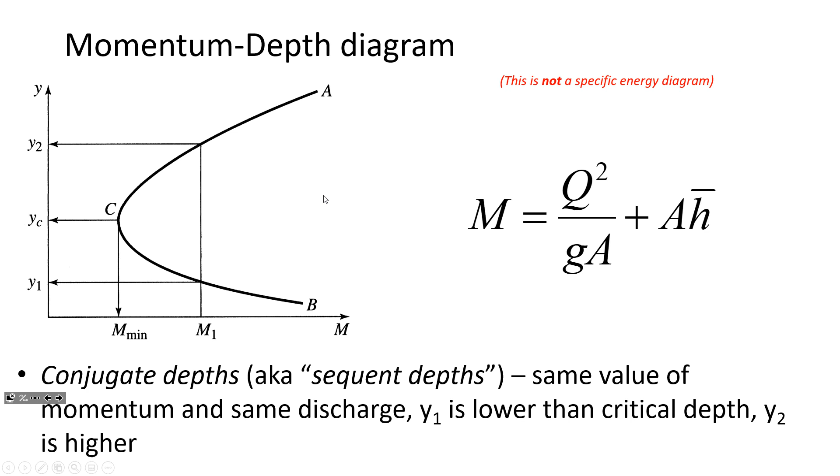And so there's two different depths that have the same amount of momentum. Now, what I introduced in Friday's class was the Belanger momentum equation. That's this one. It irritates me that you can't see that y1 - it's y1 in the numerator of that.

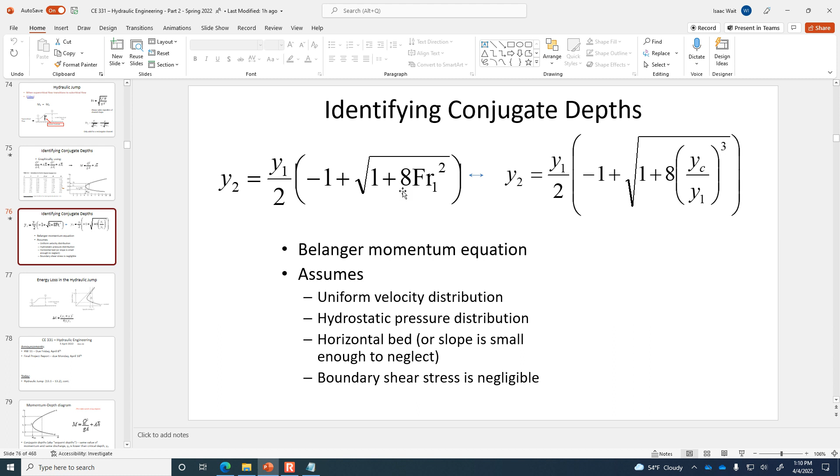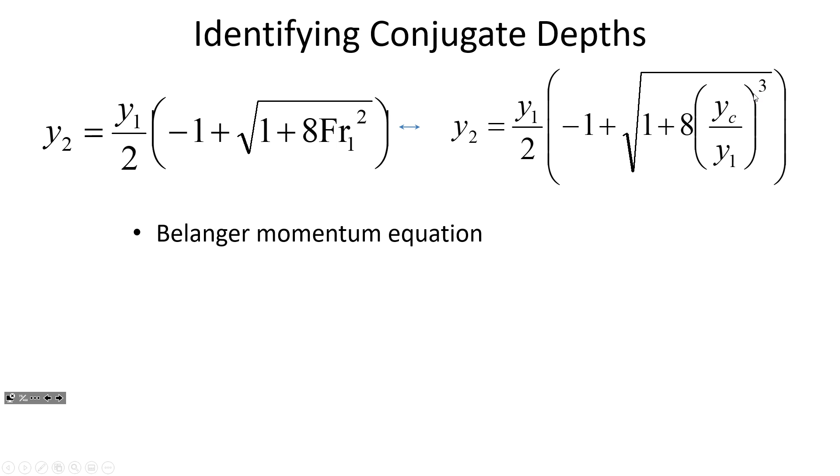Did we see a couple of different versions of the Belanger momentum equation? We did - one in terms of the Froude number, another in terms of the ratio of the critical depth to the upstream depth. And I think in that video I pointed out that if you're using the Froude number version, you're squaring the upstream Froude number, whereas if you're using the ratio of the critical depth and the upstream depth, it's cubed. But with this Belanger momentum equation, we can predict what will be the hydraulic jump's sequent depth.

And so the water is moving supercritical. Why does the water go through a hydraulic jump? It's because this slope can't support supercritical flow. There's something that caused the water to go supercritical, and then it can't stay going supercritical anymore because maybe this is a mild slope. You have to have a steep slope to support supercritical flow.

So you've got this fast-moving water that has no right to be flowing at supercritical conditions. It just maybe water was coming from an underflow gate. That's how we induce supercritical flow in our lab - we've got this gate which is pinching down, and then the water comes out supercritical, and then it goes through this jump and back to the normal depth.

So the channel that's downstream of the hydraulic jump, there's a certain depth that the water will be going when conditions are steady and uniform. Well, once the water came out from this gate, the flow here isn't steady and uniform because we've got an obstruction in the way that changed the flow conditions.

So the water is coming out at this supercritical flow, and it can't stay supercritical because the slope itself only supports a subcritical normal depth. So there has to be this transition. And water can't go through a smooth transition from supercritical to subcritical. It has to go through a rapid transition. And that's what the hydraulic jump is.

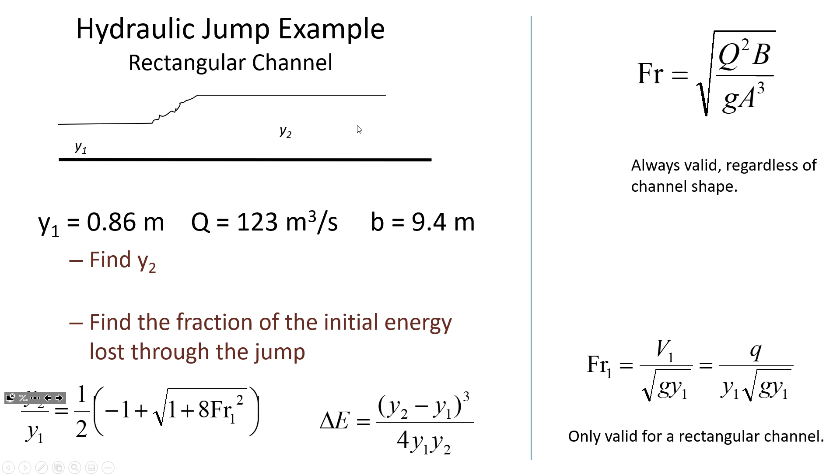Okay, so on this one I calculated the initial upstream velocity, 15.2 meters per second. I also calculated the flow per unit width, although you don't necessarily need that to calculate the Froude number, because you can see it calculated in terms of flow per unit width, or if we just calculate it based on the full uppercase Q, you get the same thing.

Our Froude number is 5.238. So the Froude number is greater than 1, meaning supercritical flow. And this particular channel has a subcritical slope, so it can't support supercritical flow.

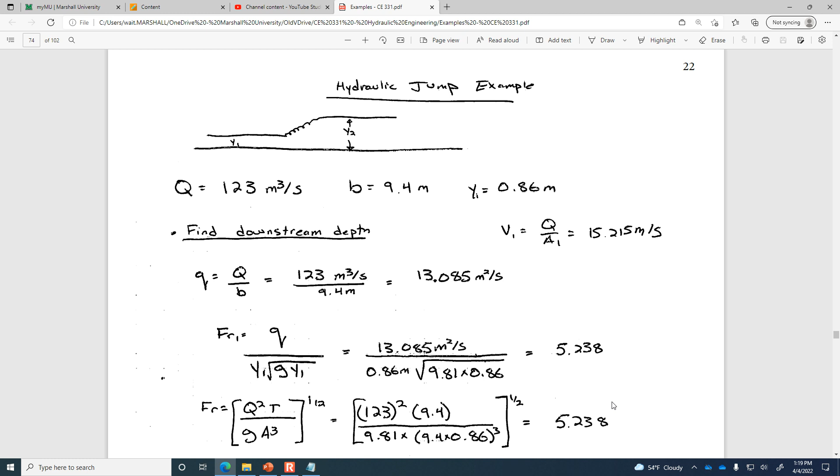So it's necessary that the fluid is going to go through a transition. We got our Froude number, substituted into the Belanger momentum equation, and the downstream depth should be 5.956 meters. So tons of energy is being dissipated here, if you think that it initially was flowing at 0.86 and then it went up to 5.956 meters.

So we could also find the sequent depth by constructing a momentum depth diagram. That would be another approach - setting up a table similar to what we saw from the recording on Friday, where we set up a table that had flow rate, width of the channel, a variety of different depths, and corresponding depth to the centroid, corresponding area, velocity, and so on.

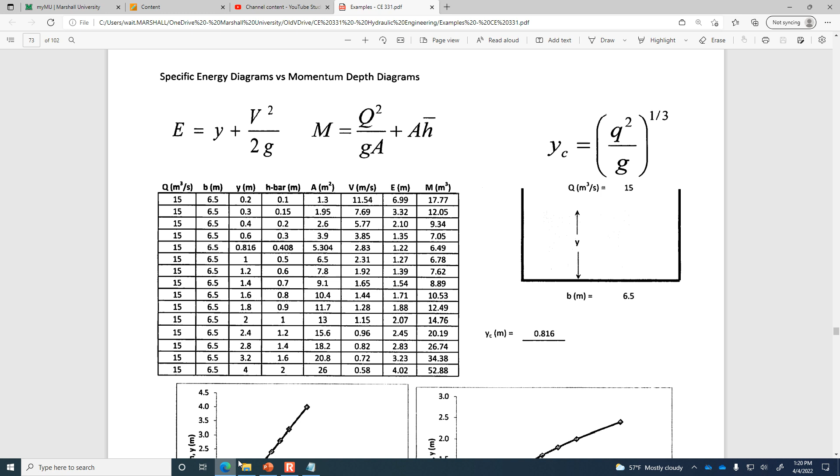If we created a momentum depth diagram and found out for the depth we're interested in, this depth of 0.86, using this table approach, we'd put in our depth of 0.86, find out how much momentum function there is, and then do goal seek to try and find what other depth has that same amount of momentum. That would be another approach to calculating the sequent depth downstream after the jump. But this problem-solving approach works just fine, 5.956 meters.

Now, what about the second part of the question? Find the fraction of the initial energy that's lost through the jump. Okay, so the initial energy that we had is the depth and velocity head.

And the energy loss - here's our formula for the energy loss. So 6.456 meters of energy is lost through the transition, and the initial energy was 12.659. So as a fraction, it's 0.51, meaning that the hydraulic jump is dissipating 51% of the specific energy that existed before the jump.

So the jump itself is getting rid of some energy that otherwise could cause scour and damage to the material in the channel downstream. So it's pretty common for when dams are being designed, if they know there's going to be an overflow spillway - let me just go back to the picture of the dam that we looked at last week, the Grand Coulee Dam.

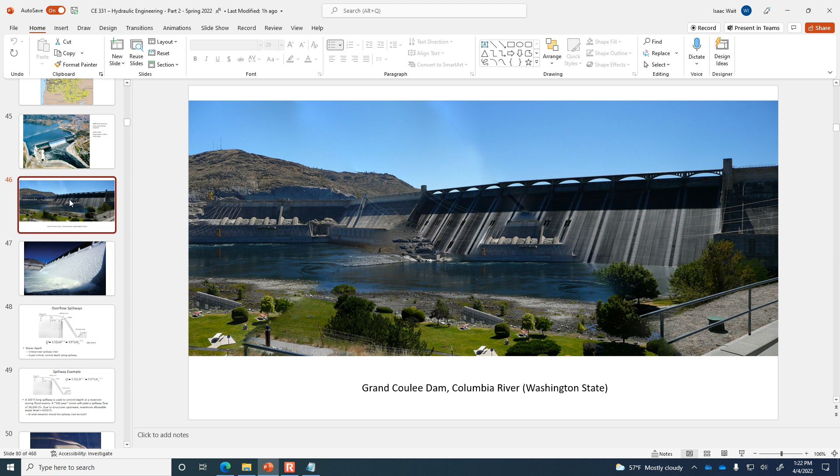So in the vicinity downstream, it's common for them to put in features that force a hydraulic jump, because you want it to happen at a location of your choosing rather than the hydraulic jump forming downstream where maybe you haven't armored the bottom of the channel.

And so it could be that they have placed concrete some distance downstream of the spillway. It's common to put in big blocks of concrete so that the water flows into those blocks, and as it begins to lose energy through contact with those concrete blocks, it forces a hydraulic jump in the region close to the spillway. Because there's just so much energy picked up as the water flows down the front face of the spillway that if you allowed that energy to exist down here, it would begin to scour the stream.

All right, so any questions on this calculation example?

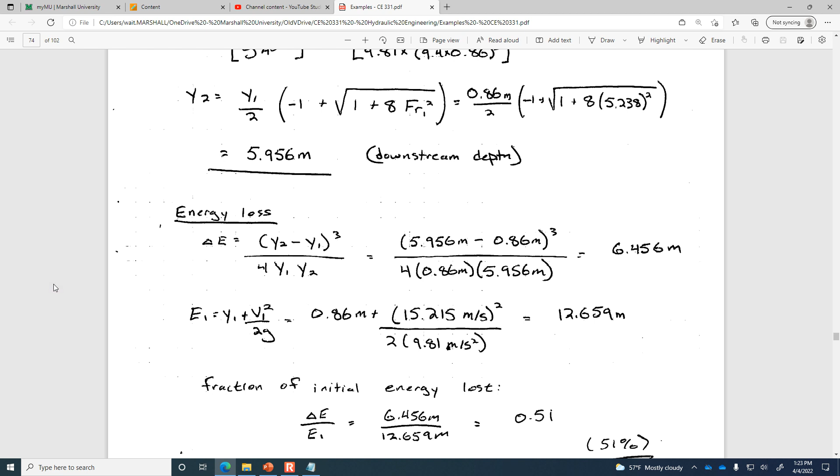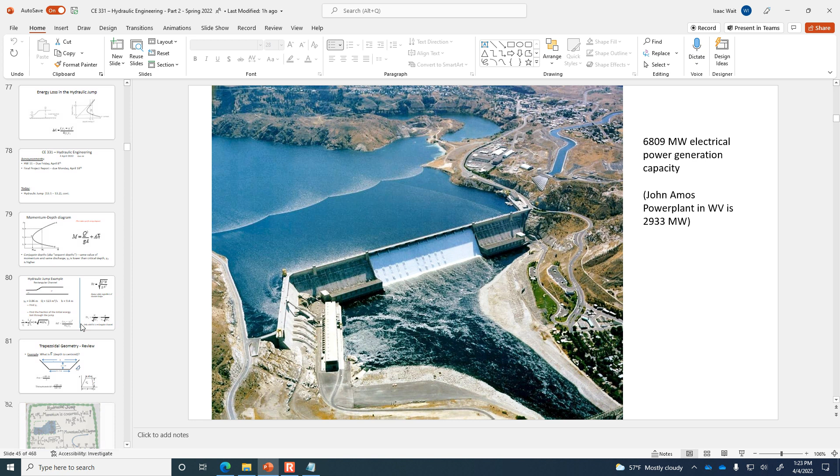Well, let's review trapezoidal geometry, because we've just done an example with a rectangular channel. Calculating the depth of the centroid is pretty easy - if it's a rectangular channel, it's just the flow depth divided by 2. But if you have a trapezoidal channel, it's a little bit trickier because the channel is wider at the top than it is at the bottom.

All right, so what I'd like you to do here is think about a channel that has a bottom width of 3 meters, and you can see it's got 1-to-1 side slopes on both sides. So first of all, what is the top width? Five. Good. How'd you know it's 5? The 1-to-1 slope and the ones.

Okay, so if we've got 1 meter of depth, then that means that the length on the corner is a meter - the top width associated with that triangular section. So we've got the 3 meter bottom width and then an extra 1 meter on either side.

So capital B is 5. Now, there's also this formula I dug up that says the distance from the bottom upward to the centroid for a trapezoid is this.

So H bar is a little bit different. H bar measures from the water surface downward. So in this example, find for this trapezoidal channel the distance from the bottom of the channel up to the centroid, then subtract that distance from an overall depth of 1 meter to find H bar. So H bar is the depth minus the distance up from the bottom to the centroid, in other words, what's left over from the depth.

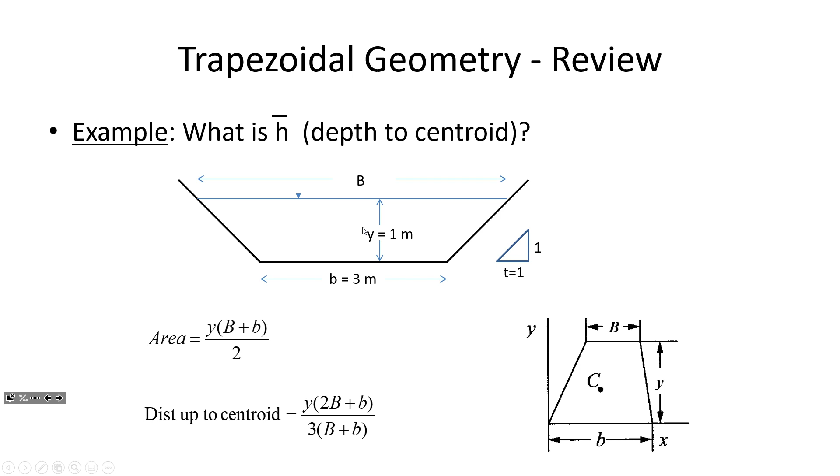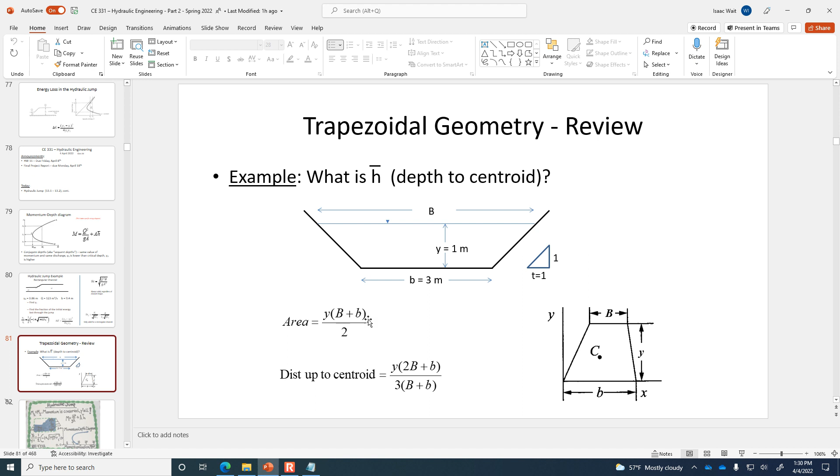So we'll work through this example. If this were rectangular, the depth of the centroid would just be 0.5. But because we've got extra area at the top that isn't at the bottom, that takes the average location of the center of area higher than the midpoint.

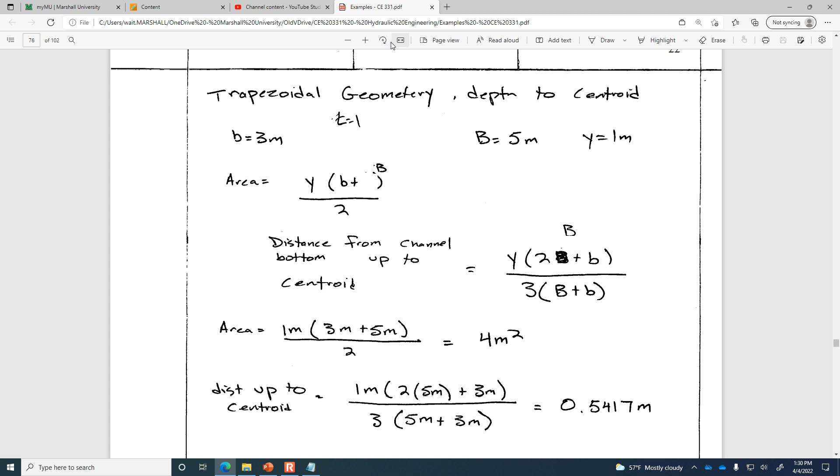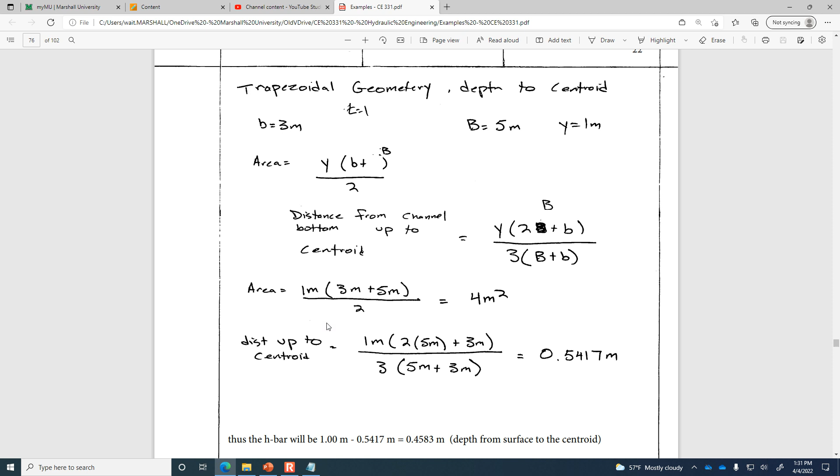So the distance up to the centroid gives H bar equal to 0.4583. Any questions about that illustration? Remember, the significance of the depth of the centroid is if you go through the process of calculating the momentum function, you need to know H bar for that.

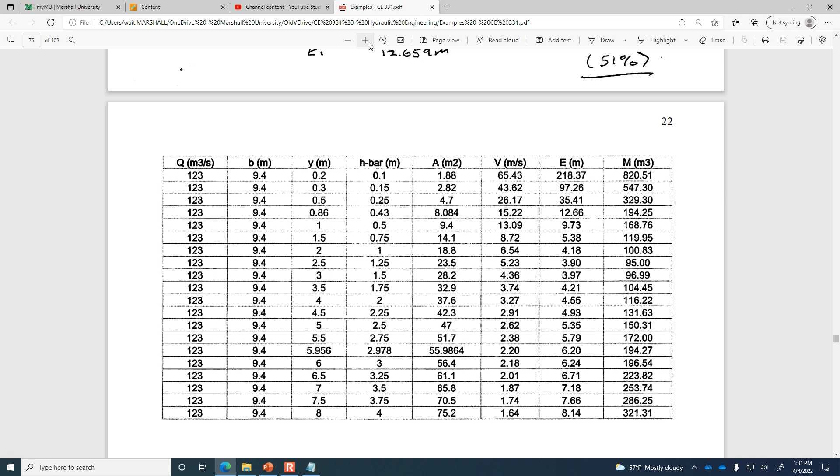Oh, it looks like here is that hypothetical I was talking about, like 123 cubic meters per second. Is that the right example? 9.4 meter width. We have the depth of 0.86. So here's the depth of 0.86. We find the equivalent momentum 194.

So if we have the 5.956 that we calculated with the Belanger momentum equation, this just kind of proves that it has the same amount of momentum, 194 cubic meters. Strange units for momentum, but for this momentum function, those are the units we're keeping track of.

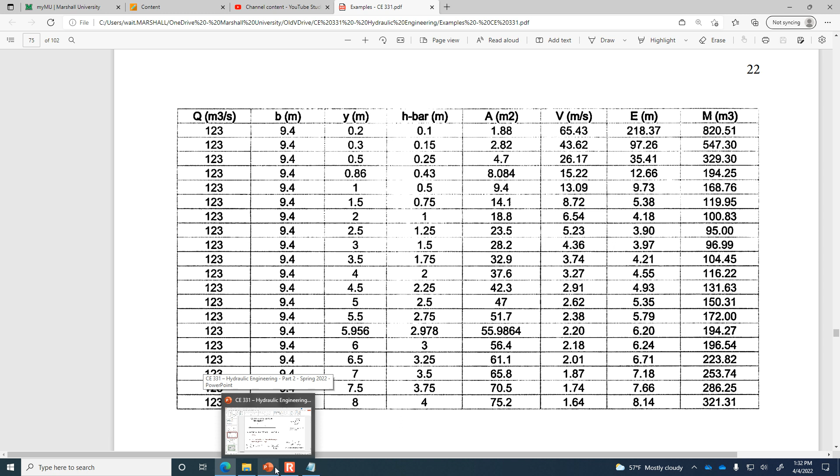All right, any questions about this trapezoidal geometry review? So if you had a problem where you were asked to draw a momentum depth diagram for a trapezoidal channel, you'd be able to do that.

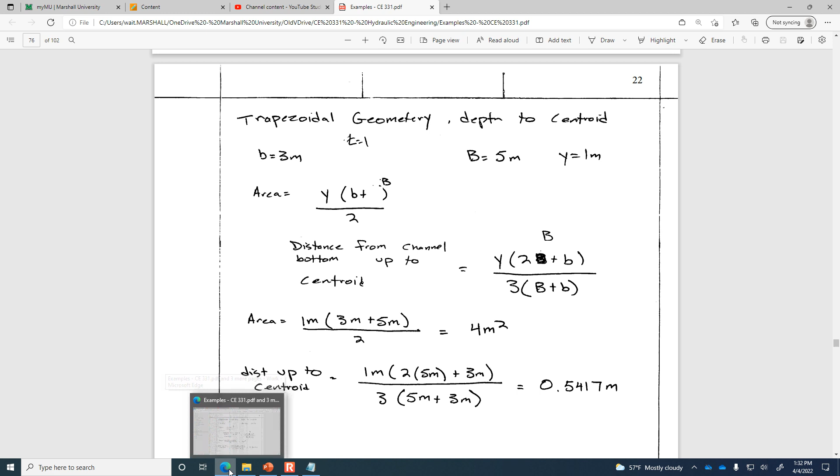One important aspect of hydraulic jumps is where they form relative to the things that cause them. I was showing you the picture of the Grand Coulee Dam, explaining that they try to force the hydraulic jump to occur in a certain engineered location to absorb the impact of all that energy being dissipated. Hydraulic jumps on their own can have a pretty long run before they set up, meaning the distance away from the thing causing the hydraulic jump.

So here in this illustration, this is an underflow gate causing the hydraulic jump. The dashed line represents the critical depth. You can see the gate impinges on the flow of the water, and there was pooling upstream of the gate. But since the opening of the gate is lower than the critical depth, that forces the water to come out of the gate at a depth that's less than critical.

That's another way we know flow conditions are supercritical: by definition, if Y1 is less than YC, you've got supercritical flow. But this mild slope—mild is a technical definition that means a slope that cannot support supercritical flow.

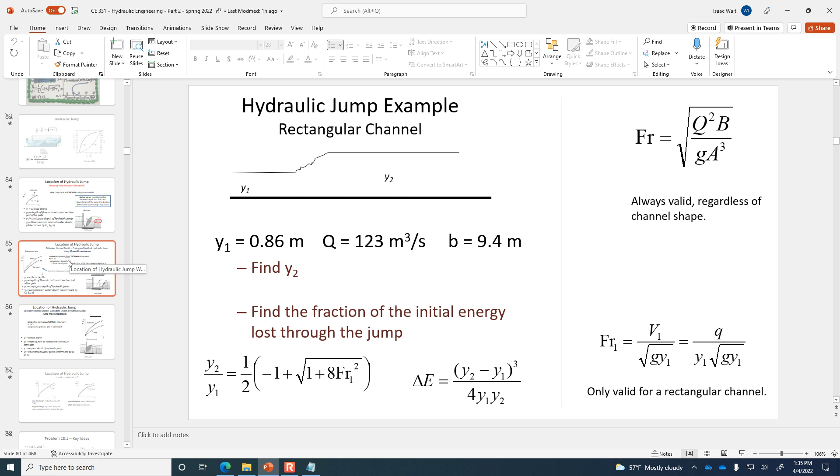But you know the Belanger momentum equation—it says y2 for the downstream depth, right? So now, when we talk about the location of the hydraulic jump, y prime 1 is the downstream jump, the downstream depth after the jump. And then when they say y2, that's referring to the normal depth that's supported by the channel. So this is a warning: new variable definitions. Our textbook throws us that curveball when it starts talking about hydraulic jump locations.

But all of these terms are defined here. Now, a rating curve is something that describes the relationship between the depth and the flow rate.

So let me show you an illustration of a rating curve. On the horizontal axis is flow rate, and on the vertical axis is depth. What makes this ideal is that the rating curves are both on top of each other. That's saying that for a certain flow rate, you need a certain depth, and they correspond exactly in an ideal case.

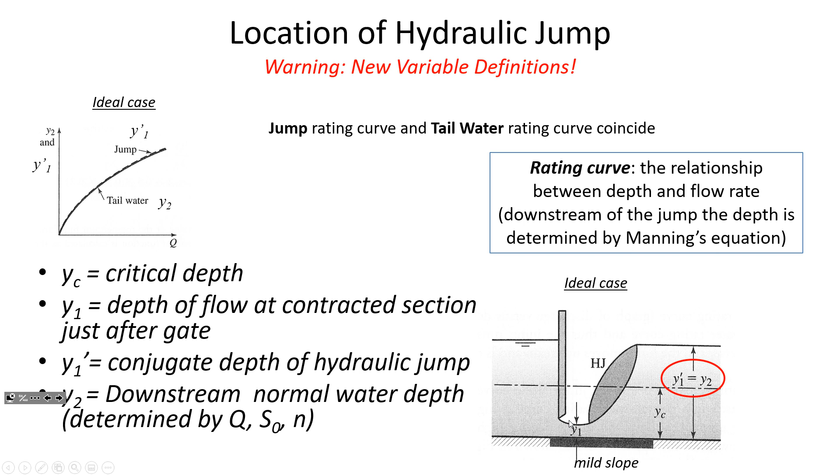So in this downstream jump example, if it was the same width of channel and same flow rate, the slope is steeper. Because the slope is steeper, Y2 is less. Remember that in a hydraulic jump, the water has to find its sequent depth.

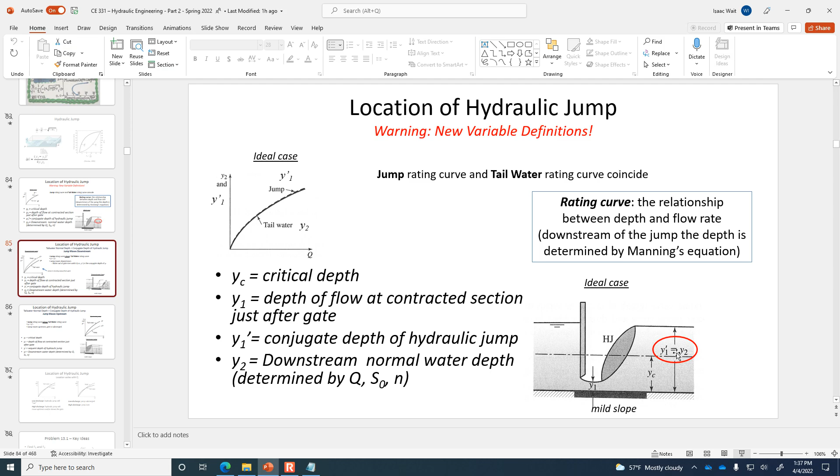If I go back to a momentum depth diagram, the water can only jump from one depth to its sequent depth. So if the normal depth downstream is some sequent depth, you have to wait until you reach the corresponding upstream sequent depth for the jump to occur.

So the way to understand this downstream jump is that here, the normal depth just happened to equal the sequent of the upstream depth. But if it was steeper, Y2 would be less because of the steeper slope. Manning's equation says the normal depth will be less, and the hydraulic jump occurs when this gradually increasing depth finally matches up to the sequent of the downstream depth.

So it couldn't jump yet at this point, because its sequent wasn't available downstream. The water depth was increasing until it finally matched up with what the sequent would be in the section flowing with normal uniform flow.

This occurs when the tailwater rating curve is more efficient than the hydraulic jump rating curve. In other words, the channel can carry the flow easily so it doesn't need to be as deep. Because the channel is steeper, the water depth doesn't have to be as deep for a certain flow rate.

To make the hydraulic jump occur closer to the gate, would raising Y1 a little bit help? Yes, that would do it.

So the things we can do in the lab to change where the jump occurs: number one, that flume has an adjustable slope. If I make it steeper, that's going to make Y2 shallower, and the jump will run away from the underflow gate.

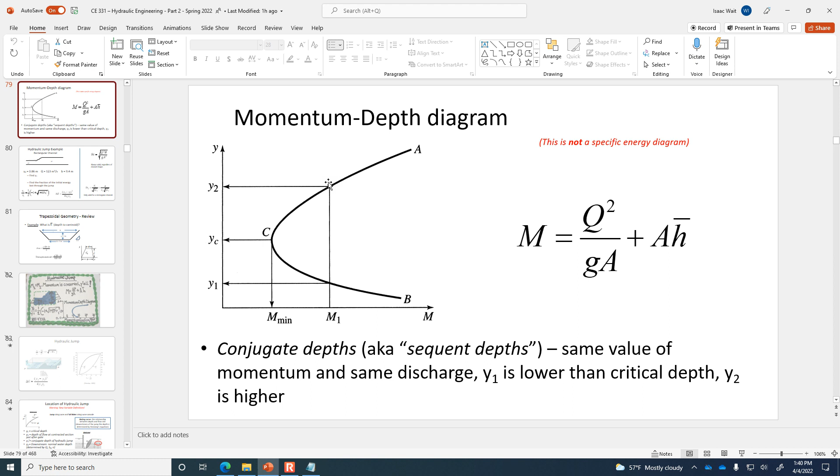But if you open the underflow gate, the flow becomes less supercritical than before, so it's going to jump up to a shallower depth. Going back to a momentum depth diagram, if you have a really shallow depth, it has to go through a huge transition to find its sequent. But if the depth isn't as shallow upstream of the jump, it won't need as deep a sequent. So the closer the two depths are to critical, the less the jump height itself is.

This is really abstract stuff, and just hearing it explained once isn't going to be enough for 99% of cases to understand and remember it. So even if you're not in the habit of reading the textbook, I'd strongly encourage you to read this section, because it'll help you understand and internalize more about hydraulic jumps.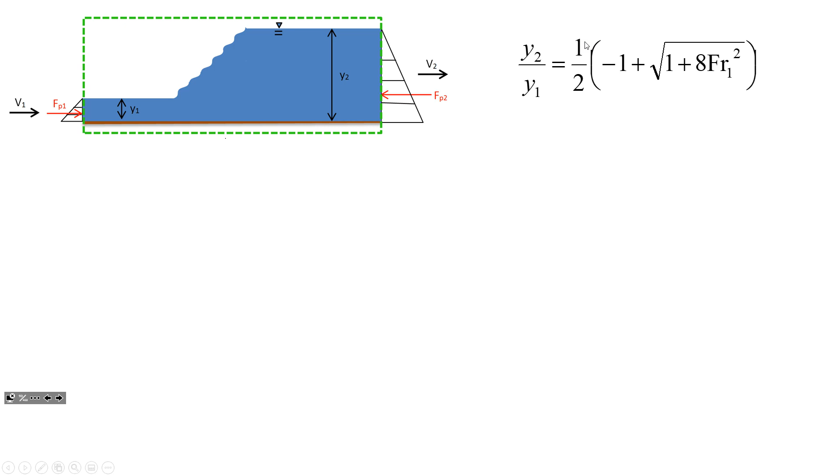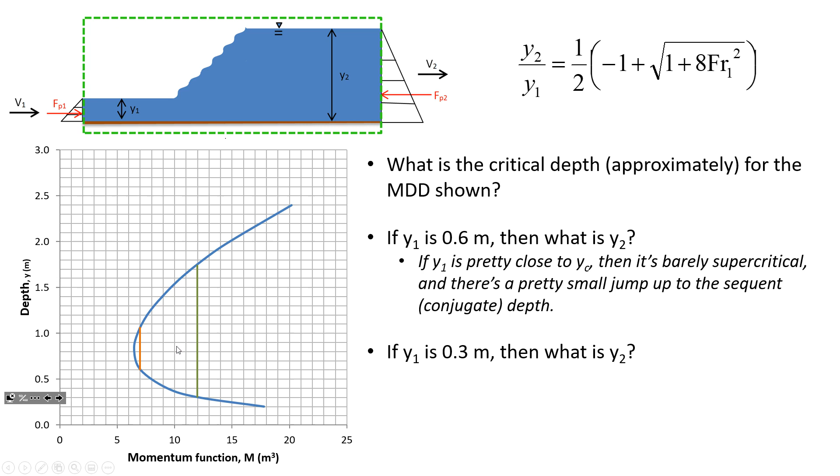But if you have an initial upstream depth that's far from the critical depth, so 0.3, see the length of this distance between the two sections on the momentum function diagram, that is how high the jump is going. So that's the difference in elevation between Y1 and Y2. Here, the difference in elevation between Y1 and Y2 is small. Here, the difference in elevation between Y1 and Y2 is big because we were more supercritical when the depth is 0.3. And the bigger the jump, the more energy that gets lost through the transition.

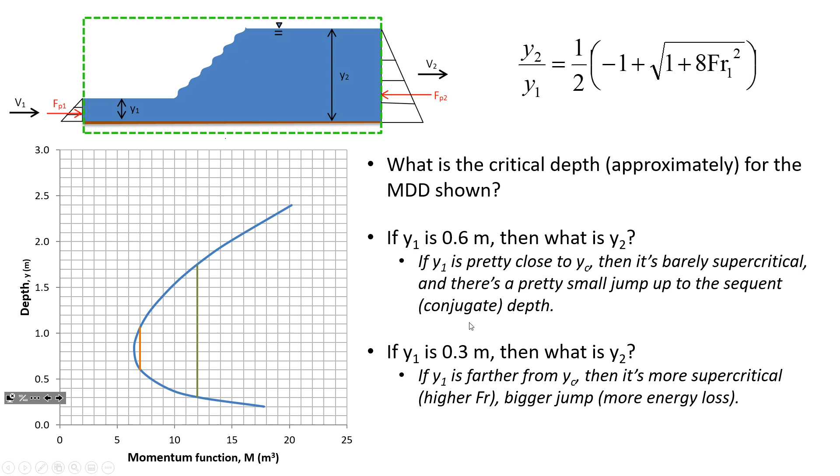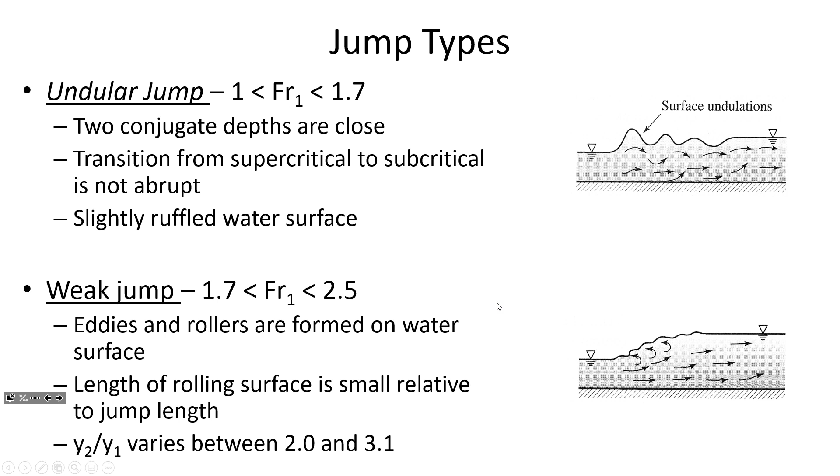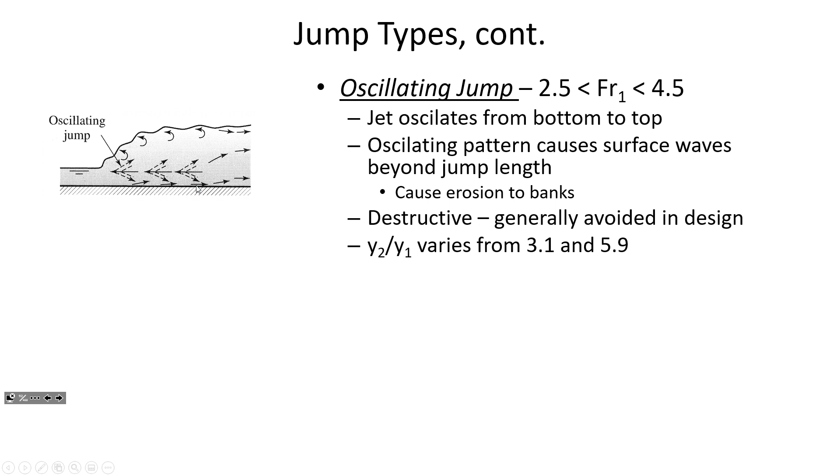Oscillating jumps from 2.5 to 4.5 dissipate more energy, but there's a lot of erosion to the banks, and there's a lot of interaction with the bottom of the channel, so they're considered kind of destructive.

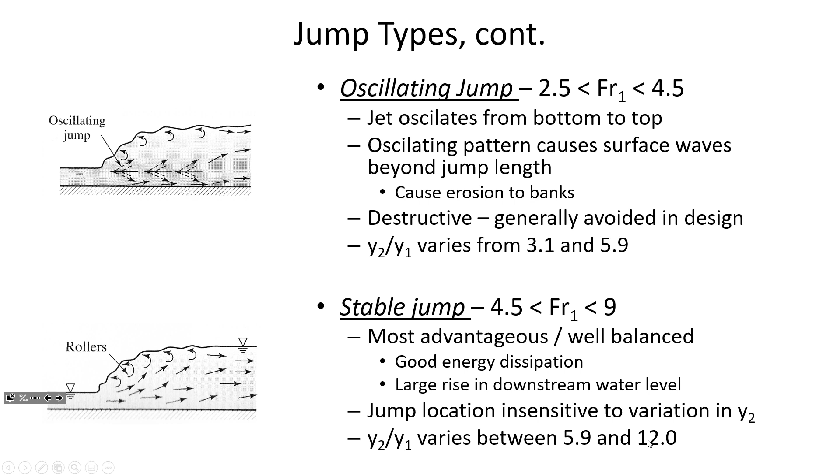The sweet spot, when you're using hydraulic jumps intentionally in the vicinity of hydraulic structures to dissipate energy, is a stable jump from 4.5 Froude number to 9. The advantage with that is that you're dissipating a lot of energy, you're causing a big rise in the flow depth downstream, and you'll notice that the velocity vectors aren't coming to the bottom of the channel at all. So the ratio between the downstream and the upstream depth varies from 5.9 to 12. So there's a pretty dramatic change in elevation.

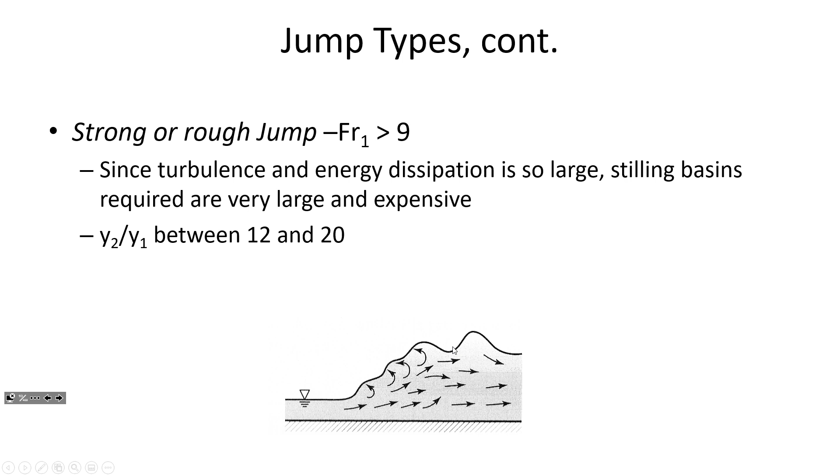And beyond that, if you have a Froude number of greater than 9, it's a rough jump, and again, there is so much energy that's being dissipated when you've got a Froude number above 9 that it would generally require concrete armored stilling basins and a lot of careful attention to what the channel is paved or lined with to prevent it from getting scoured downstream.